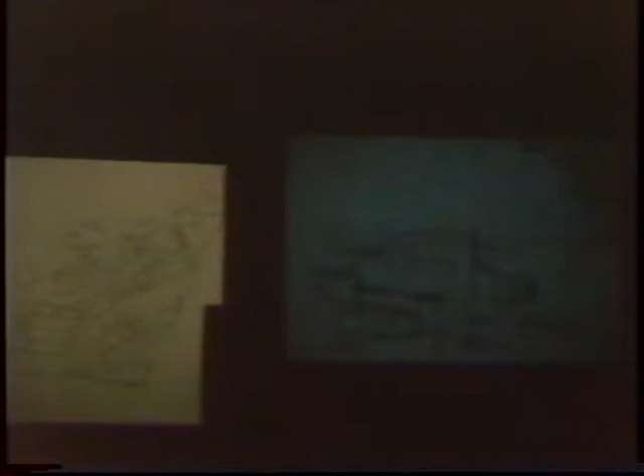This is also a small extension to a museum, and I won't say much about it except that in doing this work one was often very bloody-minded about the way the building responded to something, in this case light, view, and slope. So the curved roof, which looks positively antique now, literally thrusts back in to arrive normal to the slope of the territory. There's this great contrivance of the two walls at the front of the building to deliberately exclude the light but afford a view through the treetops across the valley of the site in Durham.

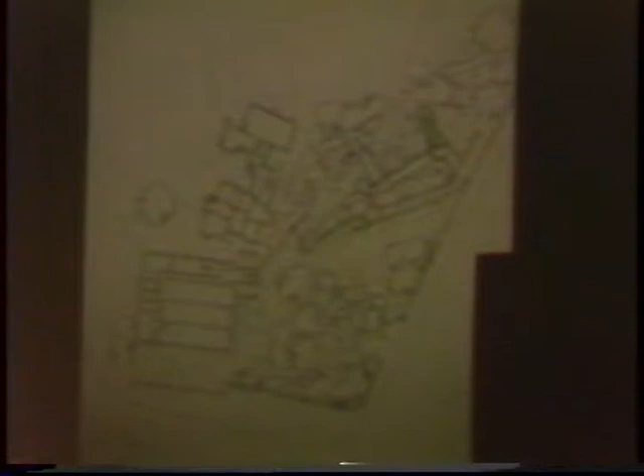And against that, a preoccupation with using reinforced concrete as a material firmly rooted in the ground, and then a steel structure with corten and galvanized cladding outside and in, as a completely separate piece, crouched on top of that, with a glass floor.

I think the idea of something very artificial and manufactured, the glass floor and steel structure perched above the kind of archaeological remains of the reinforced concrete structures, is fairly clear in these plans.

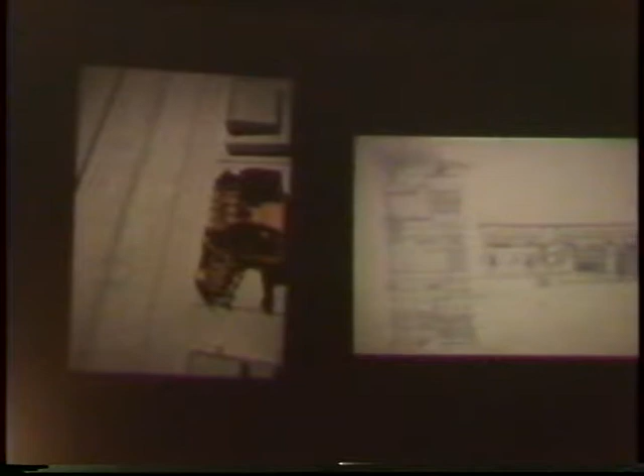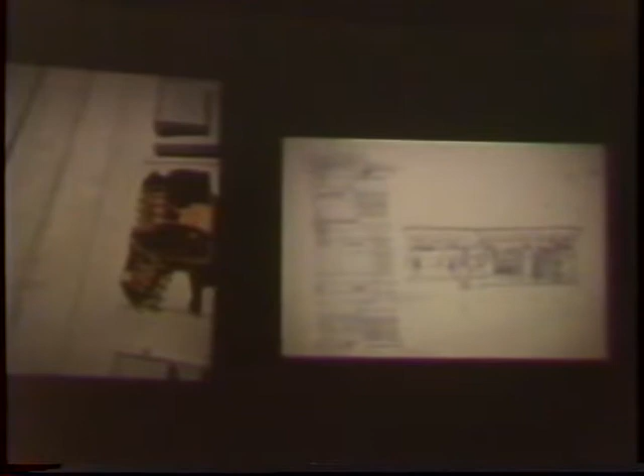The same kind of essay in reinforced concrete, with its capacity to ground a building in a rather ambiguous circumstance, was used in a little pavilion in Stoneleigh in Warwickshire. This was aggravated by the fact that the building would be the equivalent of a kind of state fair, but for all of England, so it had to be completed within 361 days in order to be operating the next year.

So in this case, the procedures of construction and materials were exercised so that the concrete is very rough indeed, much like an English motorway. And while all of that's going on, there's a series of much finer timber constructions, including a 3-story one you see on the right-hand side of the slide, and a number of screens and infill pieces, like a shop fitting exercise, again a rather archaeological creature created very roughly and quickly.

It's a house that we designed not far from London, about an hour's drive. I think after doing a series of institutional buildings, often in competition, this is a project which was much more elaborate in its anticipation of use.

I'm not quite sure how to describe that, but imagining that if there's an attention to things like particular material qualities or the constancy of the sun or natural cycles as a way of setting up the project, it seems that certainly there's some idea that those are fulfilled in some kind of reciprocal manner by the occupancy of the building in due course.

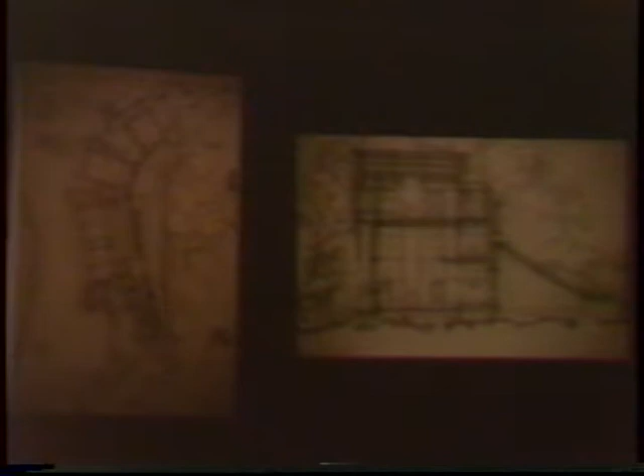I won't say much more about that except that kind of, again, strategically setting the building alongside a river and trying to enjoy peripheral oblique views up and down the river, but also invite sun through a kind of extended conservatory by an orchard on the south side, which is the right-hand side of that plan.

One of the cross sections, another whole series of developed sections working through the building. And the plan, I think again, seeing something of this interest in kind of interruptions of the essentially Cartesian organization.

And then more recently, we were involved in the last of the IBA projects in Berlin. Again, not going to say much about it, just to show something of the presumption for me to say that the issues those first few slides demonstrated an interest in have been acted out in varying circumstances and scales of work.

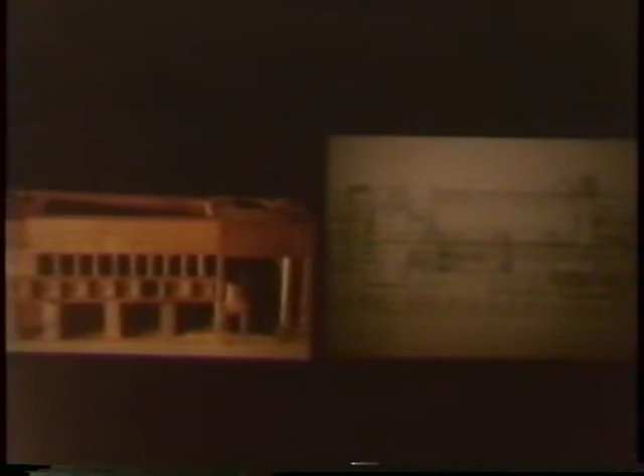One of these strange IBA programs where one did, in this case, two half-city blocks. A large kind of institutional building that occupied one part of the site. It was a kind of, what would you call it, I suppose like a small convention center kind of thing.

And then, vis-a-vis the idea about occupation, perpetuating some idea of process, instead of doing these rather tacky council houses for Berlin, there was an idea that there would be this extremely forthright and robust structure. There's a steel model of it on the left, that would then be occupied much more in the manner of a kind of warehouse loft conversion, anticipating that increasingly people might choose to work out of their dwellings.

Okay, so that's something of the kinds of context in which we had been working.

The Berlin project was rather undermined by the fact that the promoters decided that Mr. Libeskind's scheme should win, and didn't leave much room for the kind of collaboration which we had originally intended.

The woman who commissioned us for the house on the River Lambourn, it's like a terrible story really, sort of dying in the midst of developing the design. So it was all getting a little discouraging at some point.

And we were invited as one of a number of people, including Morphosis from the United States, to make these very small buildings in Japan as part of the Osaka fair of Greenery. And this rather peculiar idea that there would be no program for the building except that it had something to do with man and nature in the 21st century.

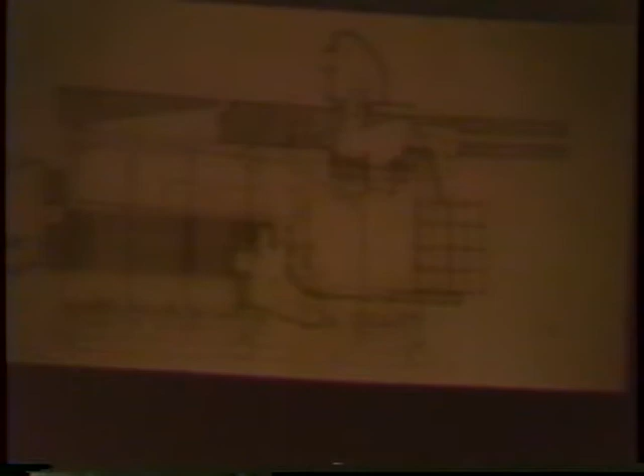I think it would be fair to say that when that particular version was presented to the client, it met with mixed reviews. They seemed very keen on the idea of quite deliberately exercising some sensibility to do with nature and building, but the idea of things deteriorating, and I think the English translation of the word they used was rot, didn't seem to be quite so appealing.

I think the other thing is that it had been very difficult for us to have a measure of how many people might reasonably be expected to brush by this building, and as it seemed like it might be very many indeed, it also seemed that the idea of these 2 steel bottles, one of which was rusting away, would be becoming extremely expensive to build in the time frame we had, or rather crude in their execution.

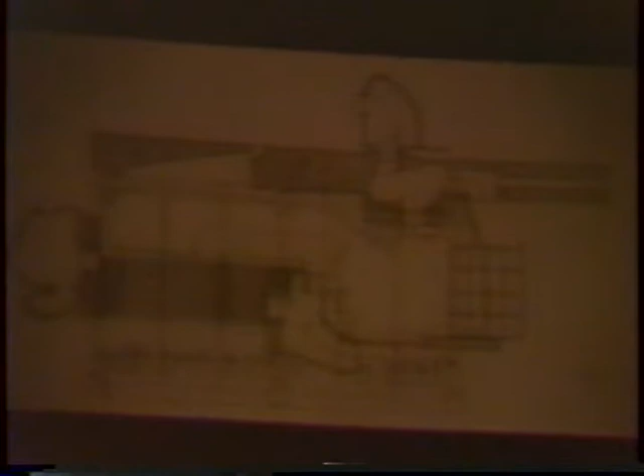So this is a kind of seriously revised version where somehow the two bottles are now made out of a kind of laminated plywood and raised up off - instead of the experience of the building having to be with climbing within the building to get within these small pavilions, one uses them as a kind of frame of the sky set within this three-dimensional matrix of timber.

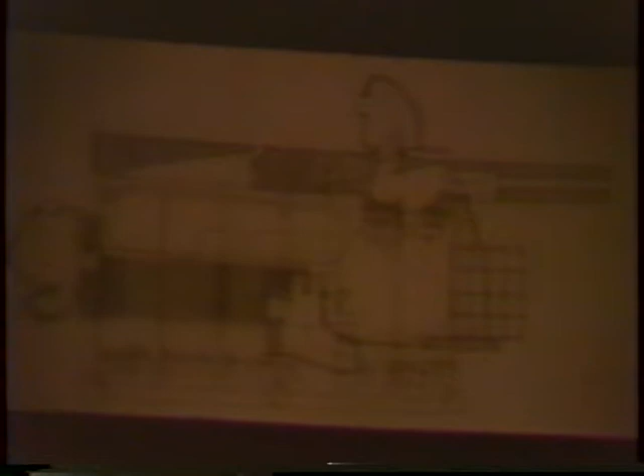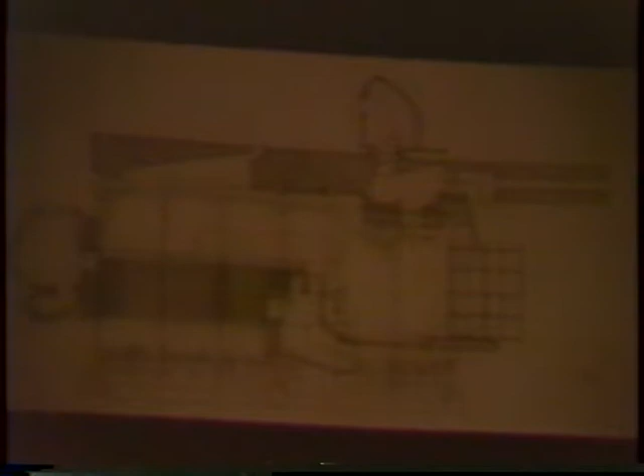The other thing that you can see, particularly in the top of the plan, is an idea of, again, for lots of circumstantial reasons, but instead of using the Oya stone, beginning to propose making some very thick walls out of a kind of rammed earth construction, which you'll see more of later. But the essential, the one order or scale of elevation which was able to compete with the scale of the monorail station, the idea of a very local landscape which contained views and allowed you to withdraw from the kind of cacophony of the World's Fair.

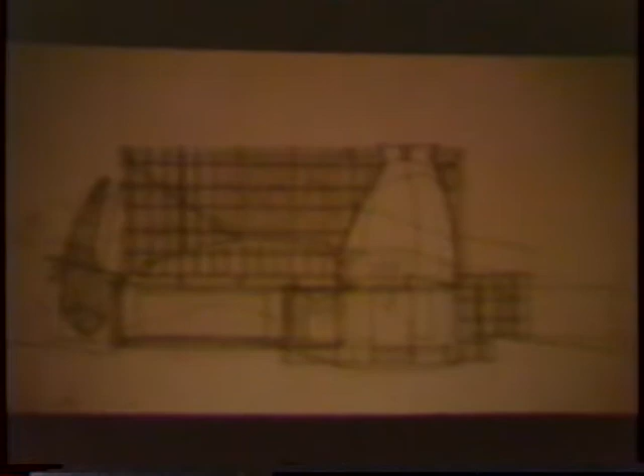The kind of gourd structures now being used to frame the sky, but having withdrawn underneath what we were calling a cage by this point.

There's just a tiny little model at, I think, 1/16 of an inch to a foot. So there's another layer of a finer matrix of timber which is not included here, but one can get something of the scale and general disposition of the pieces. And that's again this rather large scale elevation which addresses the primary point of approach.

I won't say much about all the particular reasons why each scheme changed to the other, but my interest in showing them, going back to the original quote about workmanship and craftsmanship, is the idea that work is undertaken without a clear anticipation of its final form, but rather a set of parameters and sensibilities to operate within, in which issues can be explored in an open-ended way.

And this scheme largely had to do with the question of money, really, and time, partly. This scheme was prepared literally in an afternoon as a way of adjusting to some of the difficulties with the earlier scheme. As you can see, the gourd is now singular, and the cage is much smaller, in fact very nearly the 7.5 meter cube which had shocked us at the beginning.

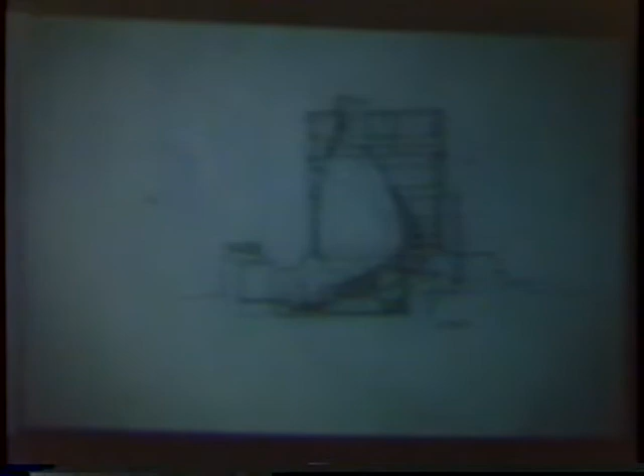The idea of the big elevation has also been diffracted somehow, and there's a series of flat screens. There's the one you see in section, and if you look to the right-hand side of the plan, there's another much larger one, like a series of elements of an elevation in a kind of maelstrom of movement and circulation, which is the condition of the site.

All of this, again, is an effort to try and ground this thing and make it absolutely distinct from the oceans of tarmac all around. There is literally an excavation into the earth, some of which is used to make these rammed earth walls, and the remainder is then formed into this slightly kidney-shaped mound which is planted with bamboo.

I think these are fairly self-explanatory, but you can see this is with the cage and gourd removed, and another freestanding curvilinear screen containing your horizon within the space, so that you drop down a slightly undulating ramp, and by the time you step into that space, the sky is framed through a kind of oculus of the gourd, and your view of things like the monorail is gone entirely.

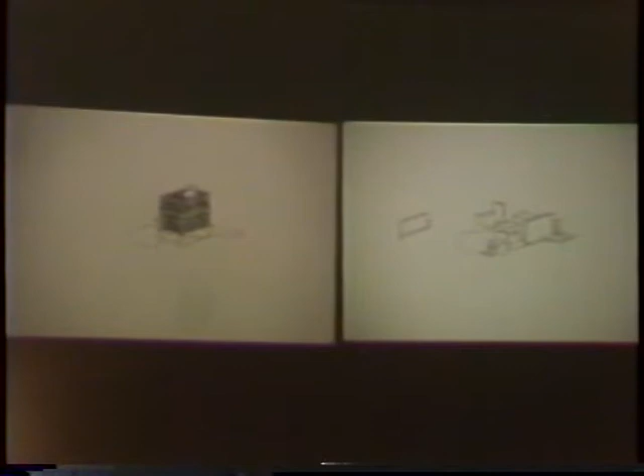These drawings are just a kind of summary: this is the excavation with the mounded bamboo garden, the cage and gourd, and on the right, all of the earthen constructions and the various flat screens that go with them.

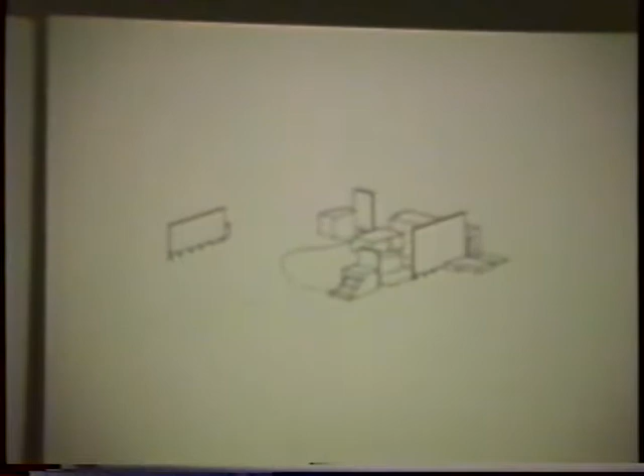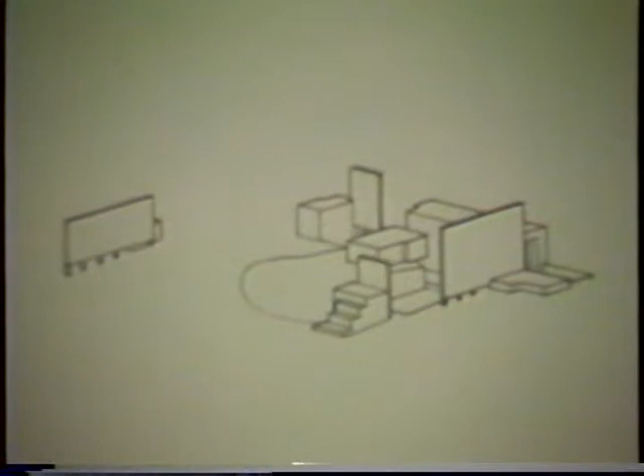So if one can imagine that on the left, there's a very deliberate effort to center something, and furthermore to give it a primitive quality—I think that's probably fair—of literally being dug into the earth. And then the slide on the right is this much more sophisticated deployment of elements of solidity and elevation, somehow attempting to acknowledge the peculiarities of the circumstance which would be developing around.

Just a little bit now about this thing of grounding, both in a general sense and as a sort of deliberate engagement with the surface of the earth, and also the particular things which had to do with making these earthen walls. If one refers back to that very first plan of the Durham Museum extension, this interest in the archaeological nature of reinforced concrete construction, manipulating the surface of the earth in a way to demonstrate, I suppose, the fragility of the surface of it.

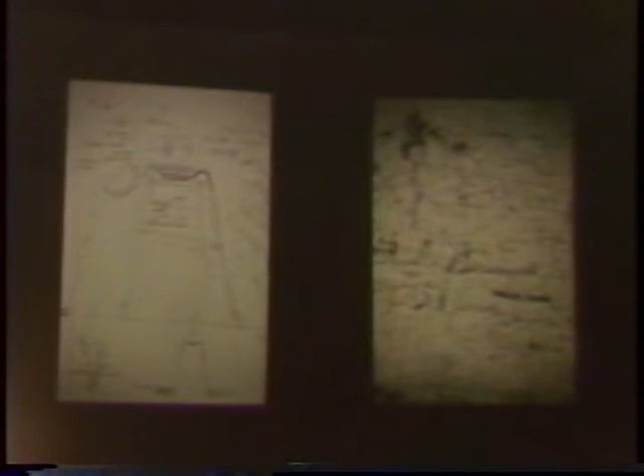I mentioned earlier on that the building was a temporary one, and when we first thought about building something in Japan, there was the kind of conceit of wanting to make it even more beautiful concrete than Mr. Ando, which was our immediate response. Then we were told we weren't allowed to do that because it was a temporary building, and we somehow found our way to this idea of a kind of Pise construction, rammed earth with essentially no additive to it, a little bit of lime but no cement.

I should also say that the contact architects we had were Atelier Mobile from the Team Zoo, and really an unquestionably interesting collaboration, and certainly the quality of the building would not be what it was without their active support on the building site.

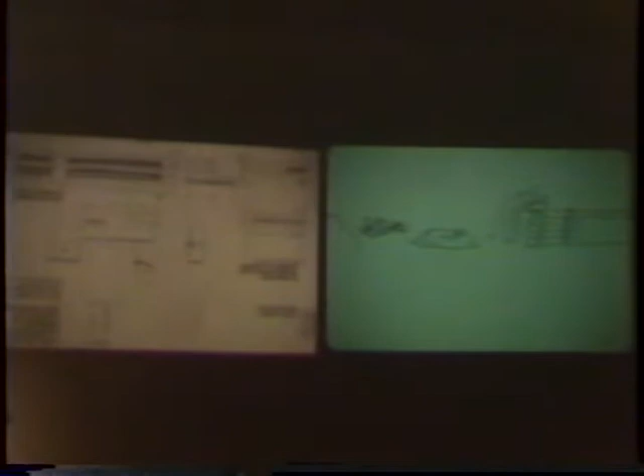I'm sorry, that's back to front. This is a drawing of Peter's, which is a kind of setting out drawing, and the drawing on the right is one we discovered later of Mr. Le Corbusier, who, in one of his notorious conversations with the provisional government of France during the latter part of the war years, was looking at Pise as a way of making very low-cost housing in parts of France.

I'm afraid what you can't see there, but some of the notes on the drawing are rather interesting because they say things like: minor fluctuations within strata to be encouraged. Our idea was not simply to make a kind of immaculate earth wall, like the beautiful adobe walls one sees sometimes in the Southwest, but that it would be sufficiently rough and ready that it would also age much more quickly during the course of the 6 months, part of the time being monsoon time.

The other thing is that really what's set out is a sort of recipe for how to make the wall, with an understanding that it would be impossible for us to draw an accurate elevation.

All it does in this case is, I think, literally take the volume of the building divided by 21 days, which we reckoned was about what they'd have, and then work up from a datum all the way up to the top of the tallest wall. So in any given day, more or less is being put in, and the color or density of the earth would be up for grabs to some extent.

The only real condition was that there would be a string course of tiles laid on edge, which would establish where the original ground level would be. You can see on the top left a kind of cartoon of what this might be, but as I say, without any clear understanding of what would happen on site.

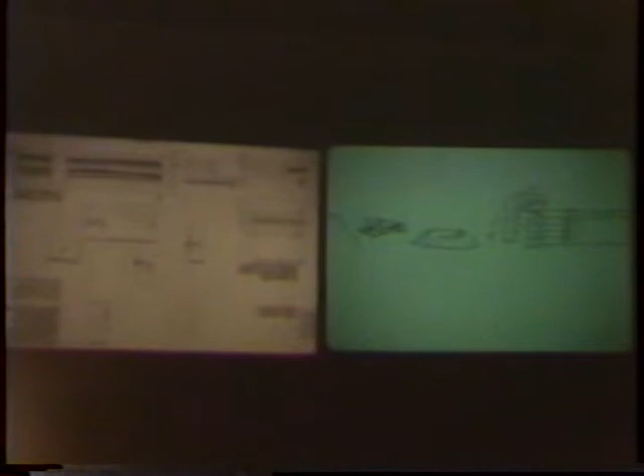So once again, this notion of certain consequences being allowed to take place, not just allowed but invited into the idea of the building, and to some extent the very quality and substance of the building being at risk. On the right is a drawing taken during one of the visits to explain something of this kind of hairiness we were after. I think when you see the finished work, it obviously worked to some extent.

It's just a conventional Japanese technique of using interlaced bamboo as a lath and then plastering over it with mud with bits of straw in it, which is in fact the technique our contact architect had originally assumed we intended. One consequence of deploying that technique is that it has an incredibly powerful texture on the back side.

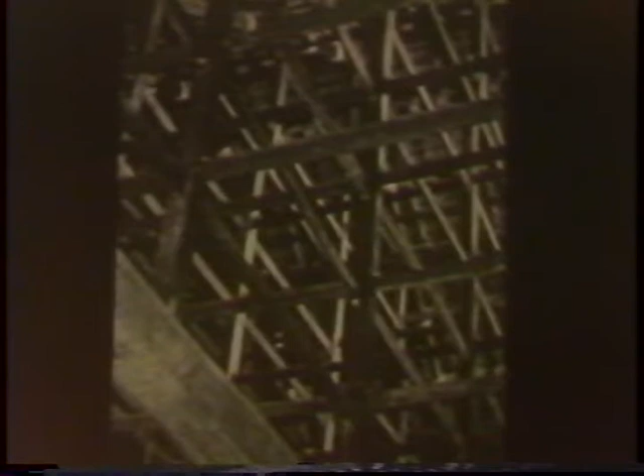The cage and gourd - the construction of them in some cases is much more straightforward than the rammed earth. For the cage in particular, we were able to use some very fine carpenters who make tea houses down in Nara, and they did some terrific work - well, some terrific, some certainly passable. The thing about the gourd that became increasingly problematic was, apart from how to suspend it in a timber frame that didn't seem like it was going to have much structural strength, the obvious fact that making the non-Cartesian form is about 100 times more difficult given the general collection of building practices we know and love than building something like the slide on the left.

So it went through, as you saw in the very first scheme, the idea of making it out of sheet steel wrapped on an extruded steel frame. It then was going to be made out of laminated plywood by a marine boat builder in Canada, of all places, but the shipping of it became extremely difficult. The contact architect thought there's a traditional technique of using basically a kind of papier-mâché with a persimmon lacquer.

And in the end, it was made out of a sort of artificial kind of canvas by a sailmaker in England.

The cage first - I mean, the reason these two must be understood together is in the midst of all this prevaricating and finally deciding to make it out of cloth and suspend it from the timber, the carpenter obviously wanted to be getting on with the job. So one prepared a bunch of drawings which tried to describe very precisely the form of the gourd, and also the obverse of that, which would be the point at which all of the timber frame stops.

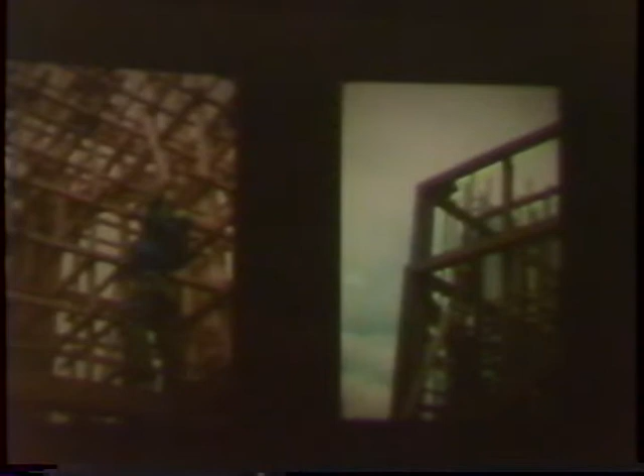And under construction - essentially a very, very straightforward bit of work. Having made all of these wonderful joints, the inevitable building inspector walked by and decided that they should bang a few bolts in, which seemed rather a pity. But that's why those are there - they're not the workman's idea.

Again, because of reasons of cost, that final tertiary level of timber lattice that was intended to be part of the cage was never constructed. So this is as dense as it finally ended up, and you can begin to see one of these flat elevational pieces.

As I say, the gourd was problematic. I mean, the incredible liberty of being able to move your wrist and make a shape which seems at once sensuous and expressive of sensuality, and at once complex - almost inevitably complex and subtle in the way it might register light, for instance.

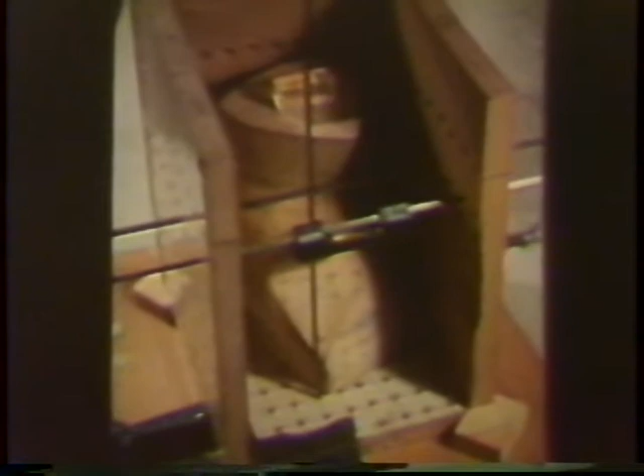The grid of the timber lattice then is this sort of level of high technology which we employ - you push a little stick through and measure it, and then send the dimension off to Japan in a fax. The model of the gourd is then given to the sailmaker, who literally just takes dimensions off it with a set of calipers.

Makes a kind of, I suppose, roughly comparable to the kind of pattern for making clothes, and then puts it together. Again, an extremely elegant junction between the two items.

Very high technology. I don't think I would include that in what I would call romantic, but it does have a certain quality about it. And there you can see something of the quality of light coming through this semi-translucent material, which I think, in the end - like many of the decisions which took place in that last round of changes - made the scheme infinitely more powerful.

In showing you - I'm afraid these slides are not absolutely wonderful - but also, if you think back to the slide of the before and after site photographs, somehow while you're watching these last pictures, which really just show various elements of the building as it was finished construction, you have to imagine the sound of the women in the pink satin outfits as they bow and say hello to you. You're coming off the monorail, and this kind of incessant tinny music everywhere.